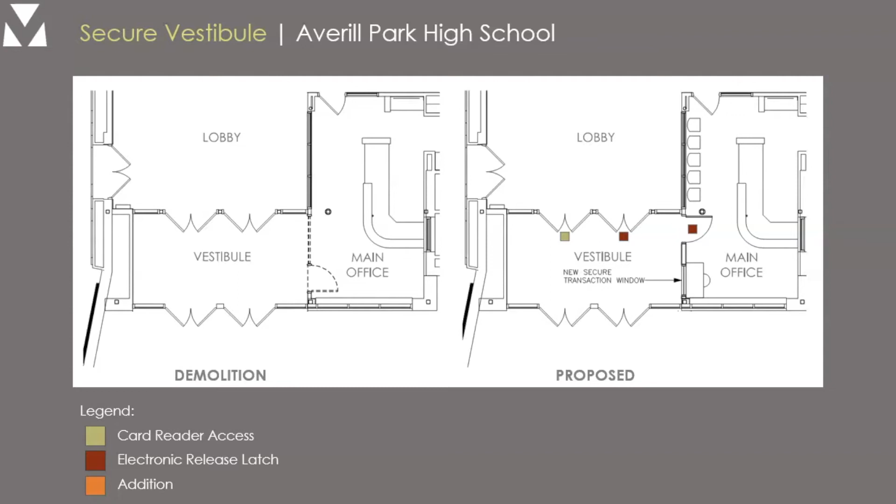This is the vestibule for Averill Park High School. This is the proposed vestibule for George Washington. The district still owns the George Washington School and wants to make sure we're keeping that building up to code and up to par with safety.

You'll notice the orange area, which is a small addition. This addition is required in order to provide for that secure vestibule area. It is the only one of the secure vestibules that require an addition.

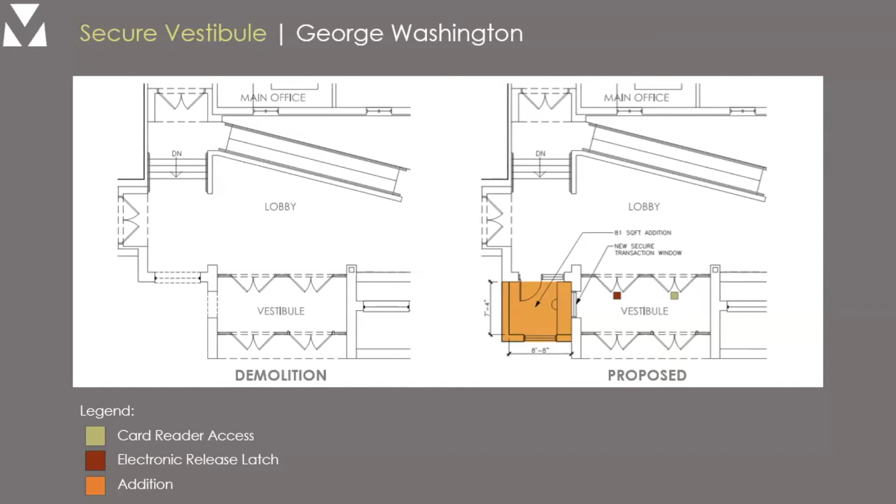This is the secure vestibule at Miller Hill, Sand Lake, and the secure vestibule at Poestenkill.

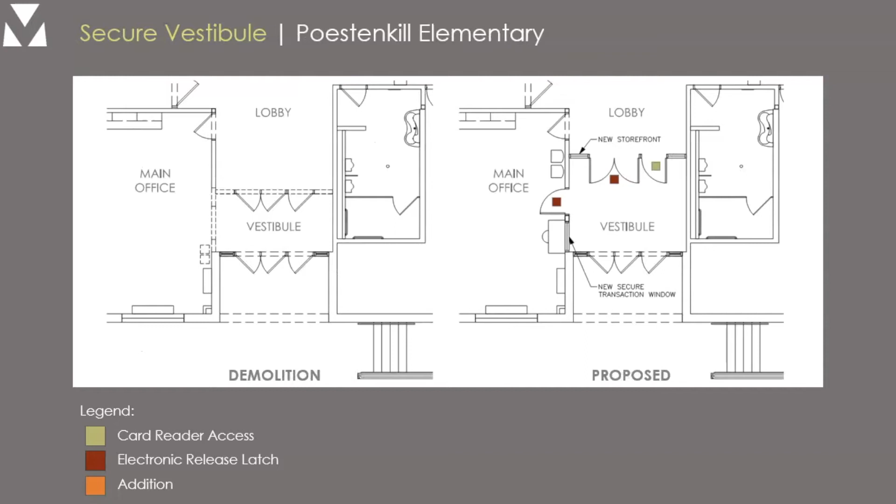Finally, the secure vestibule at West Sand Lake Elementary.

The current Averill Park High School Construction Technology Lab is overcrowded on the inside, and the space on the outside is not well utilized. As a result, the project calls for enhancements and improvements to this area, including an expansion.

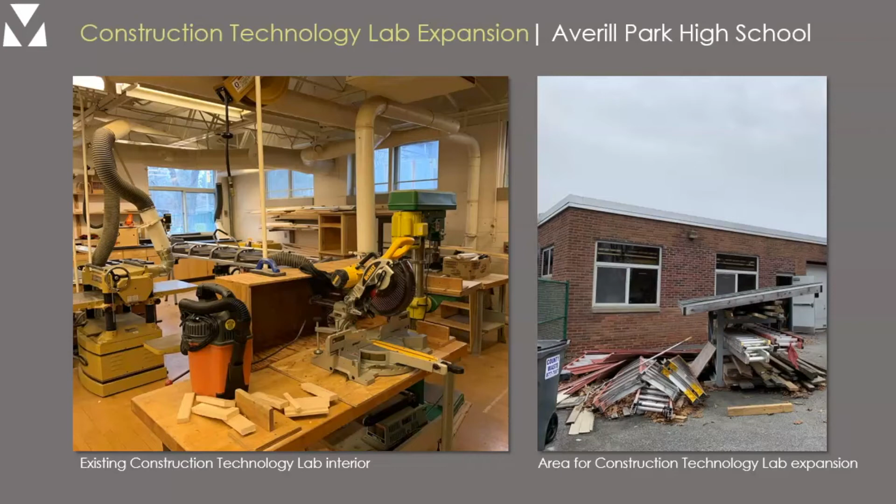Here is the proposed drawing for the Construction Technology Lab at Averill Park High School. The area on the left in darker orange would be an addition. The area on the right, the lighter orange, is current space.

As part of the expansion, not only will you have more room, which will make it safer for our students as they use the machines in this room, we're also going to add an overhead door, incorporate movable tables, which will allow for more collaborative learning, and in general create a better learning environment and a safer space for this area, which has classes in it that are extremely well subscribed by our student body.

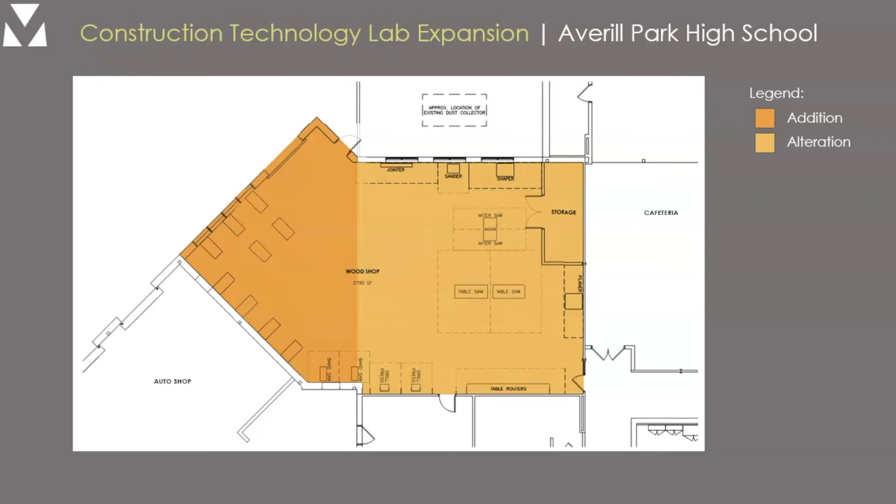As mentioned, the building condition survey is required every 5 years. These are some of the critical building maintenance items that will be addressed in this referendum. The list you see in front of you is not comprehensive. There will be other things that are certainly included in this. It's important to note that the LED lighting upgrades that are proposed will provide future cost savings to the district.

These are some pictures of some of the areas that are going to be covered in the referendum that are part of the building condition survey.

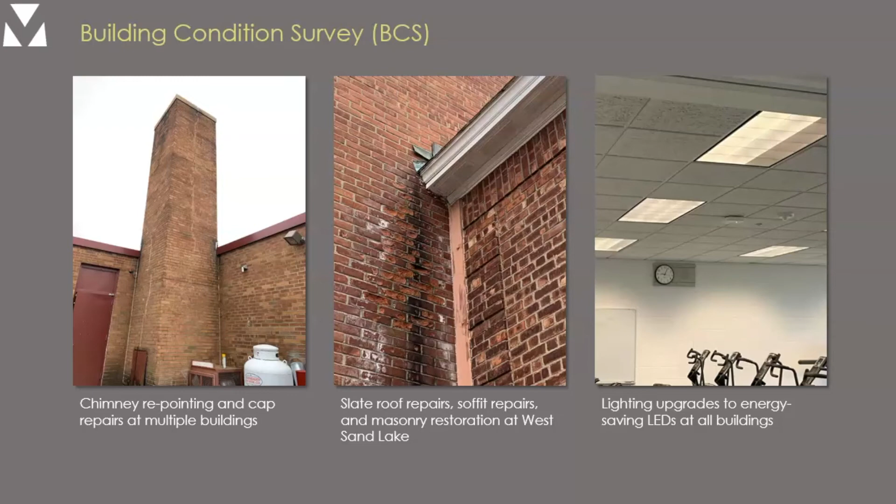In terms of educational improvements, at Poestenkill, we're going to add a guidance suite. This guidance suite will enable us to eliminate the old classroom trailer. The guidance suite will include a faculty room and a conference room. It'll be in the existing building.

This picture here is of the trailer at Poestenkill. And here is the new proposal for what the space inside the building will look like.

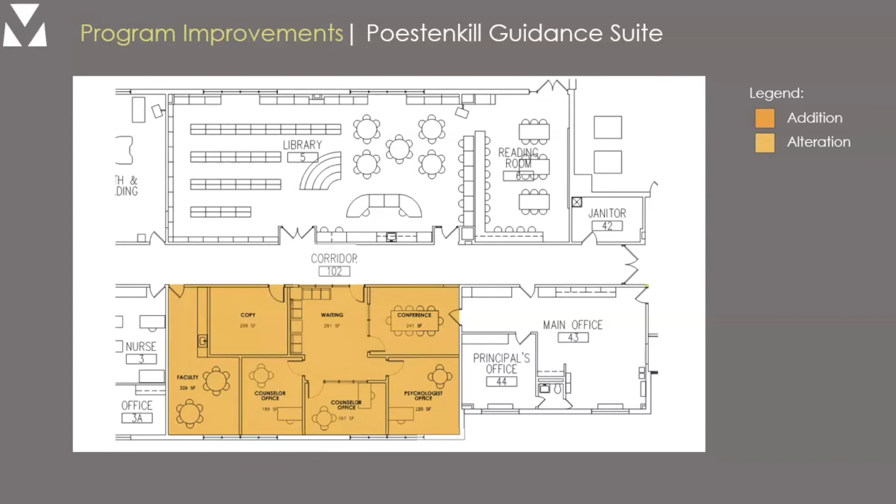Our architect has identified 2 underutilized full-size classrooms in the building. Those rooms will be repurposed to provide a waiting room, spaces for counselors and the school psychologist, maintain a faculty room that is appropriate size, and add a copy room that is separate, as well as a conference room that is accessible from both the new guidance suite as well as from the main office.

The Miller Hill cafeteria is currently overcrowded. There's limited natural light coming in, and the acoustics are not very good in that room. This renovation will allow us to expand, improve the natural light, and the acoustics.

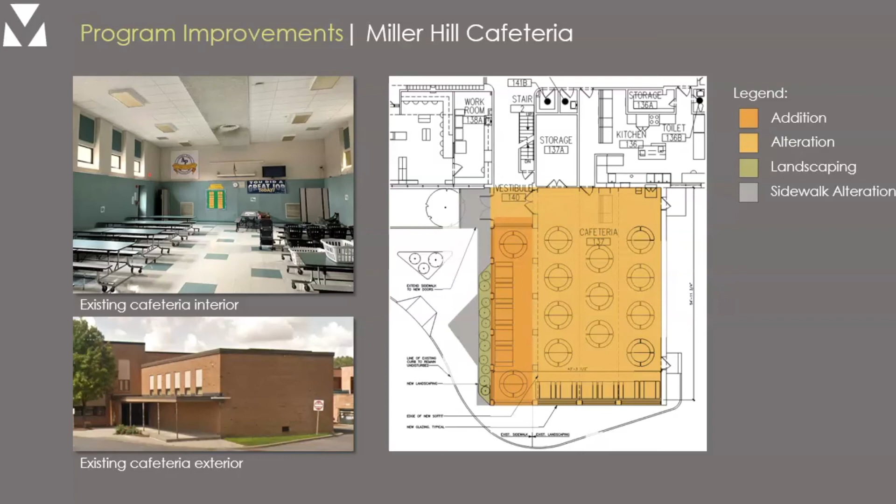We'll be moving the robotics area into this wing, where it more naturally fits, and adding and upgrading outdoor working space for the art rooms and the technology rooms.

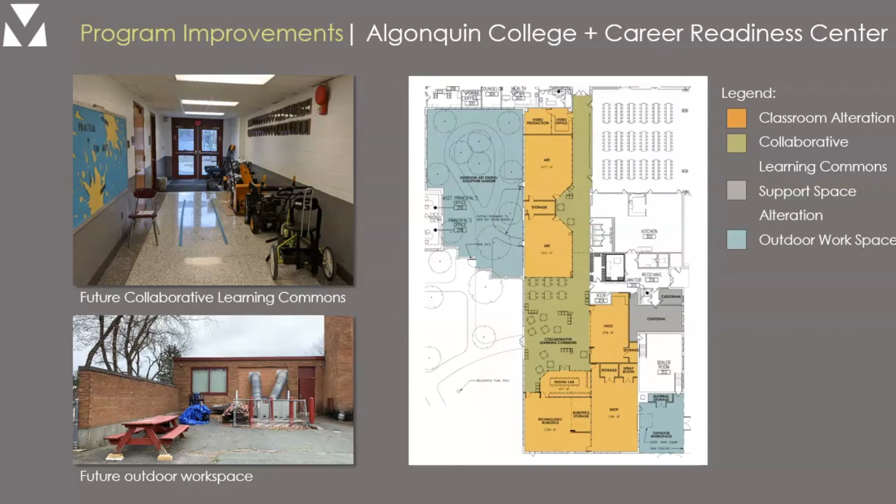To give homeowners a realistic example of what that will mean to them, we provided this example to the board. The estimated average tax increase for homeowners who have a home valued at $100,000 beginning in 2023 will be $48.

You can arrive at the rate for your particular house by taking the assessed value of your home, dividing by 1,000, and then multiplying by 0.48. That'll be the total tax increase that you will see as a result of this referendum if it is passed.

The amount will be phased in over 3 years. So the total amount will be phased in over that time, beginning in 2023.

In terms of the next step, on February 24th, the board will have a resolution to set the vote date. Public communication will continue in March, April, and May, and the referendum vote will be on May 19th, which is the date of the general budget vote.